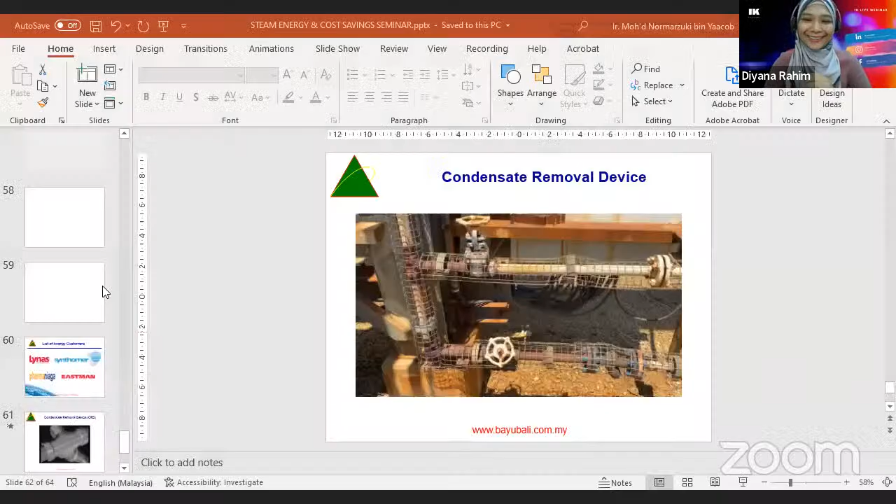Assalamualaikum and good morning to everyone. Our topic today is steam plant energy and cost savings. Basically, the boiler is part of this training, and ICE I will cover later on with the next slide.

This is about myself. Miss Diyana already mentioned my profile, but I put it here again as a brief summary. I'm a mechanical engineer, graduated from University of Malaya in 1996, considered an OTA engineer. I'm also a professional engineer with practicing certificates in mechanical, and a first grade steam engineer and ICE engineer by DOSH.

My field of expertise is mainly steam boilers, steam energy and cost saving, and any mechanical works inspections, but I've put a summary here. Just a little bit about my career profile.

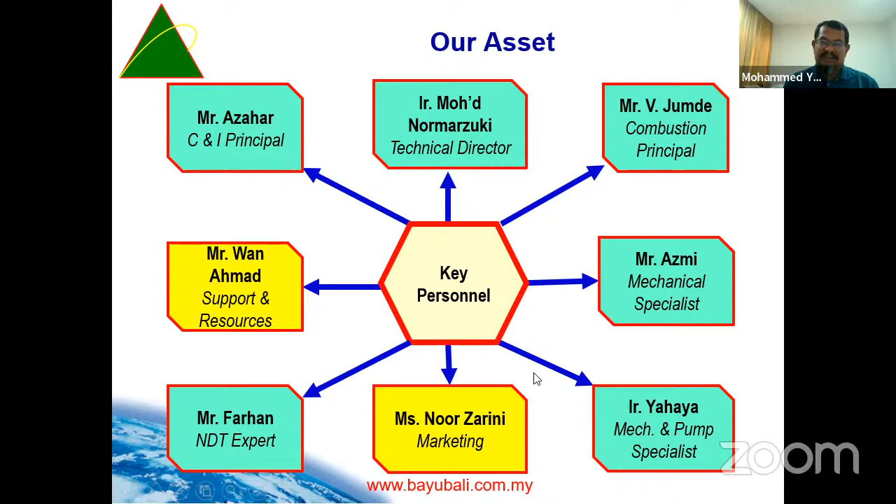So some of them are our consultants, and then Ms. Noor Zarini is our marketing.

So our business, as I mentioned, we started with technical training courses, but now that's not our main business. And maintenance services, yes, we did boiler overhaul maintenance, boiler inspections. This is actually our core business right now.

Our core business, we shifted from training to steam energy improvement plans, or projects. We don't just audit and pass the report to the clients and then the client cannot go anywhere. Basically, we are a one-stop center for this.

And then we provide also visiting engineer for boiler and ICE. And one thing is about the combustion optimizations.

Right now we are in the process of getting the purchase order for one plant in Kluang, because they have some problem with the combustion. So we already did the preliminary work.

And then we are doing the steam plant design review. And then we also provide the steam piping design. Currently we are in the process of designing for one of the companies.

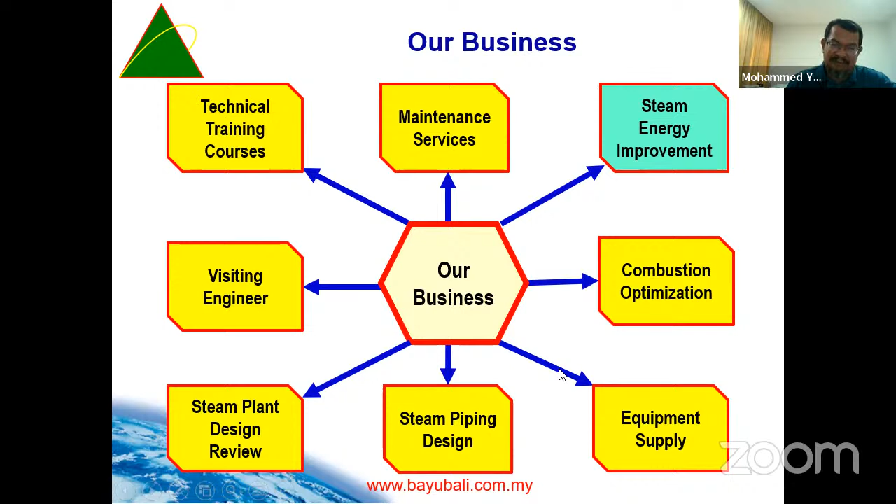And then we also provide equipment supply, for example we supply valves, pipes. Yesterday we got an order, one big valve, so my staff just sent it over.

So, let me see the steam energy.

Overview of steam energy efficiency. Energy efficiency simply means using less energy to perform the same task. It is eliminating energy waste.

Energy efficiency brings a variety of benefits like reducing greenhouse gas emissions. If we are efficient, we'll burn less fuel, so we reduce the GHG. It also reduces demand on energy imports, since we burn less fuel if our plant becomes more efficient, and it lowers costs at an economy wide level.

Steam systems account for around 30% of the total energy used in industrial applications for product output.

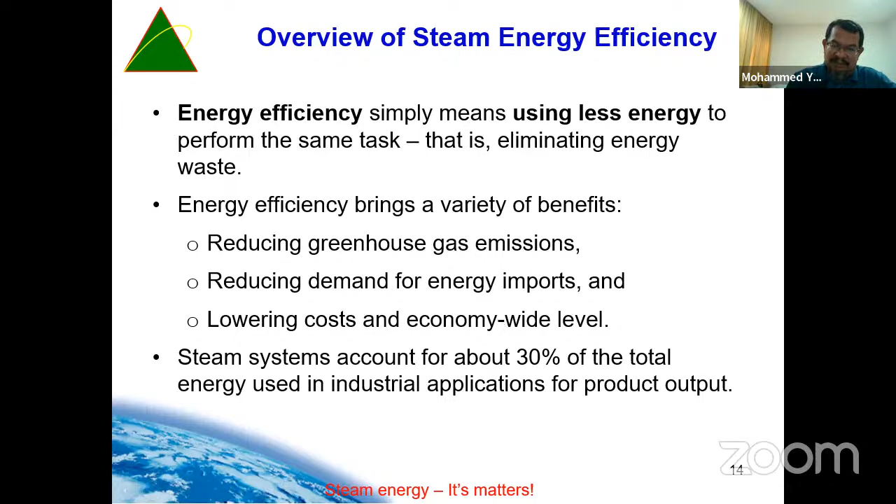Like 2 days ago, I visited one of the paper mill plants in Penang. They use a lot of steam for their dryer system, so they asked me to design the steam pipe for them. Now I'm in the process of preparing the proposal for them. And steam systems can be...

...indispensable in delivering the energy needed for process heating. We know steam is used a lot for process heating, not only for manufacturing, but in oil and gas, petrol, and chemicals, they use steam for process heating, for example to heat up the heat exchanger, and for pressure controls.

And then mechanical drive. Mechanical drive is mainly used in power generation, or to drive pumps and compressors. And then separation of components and production of hot water for process reaction.

Some plants use hot water for part of their process. For example, I'm in the process of negotiating right now with one company in Penang to install what we call condensate recovery pumps. They use hot water, so we want to integrate the hot condensate into heating up the hot water for their process.

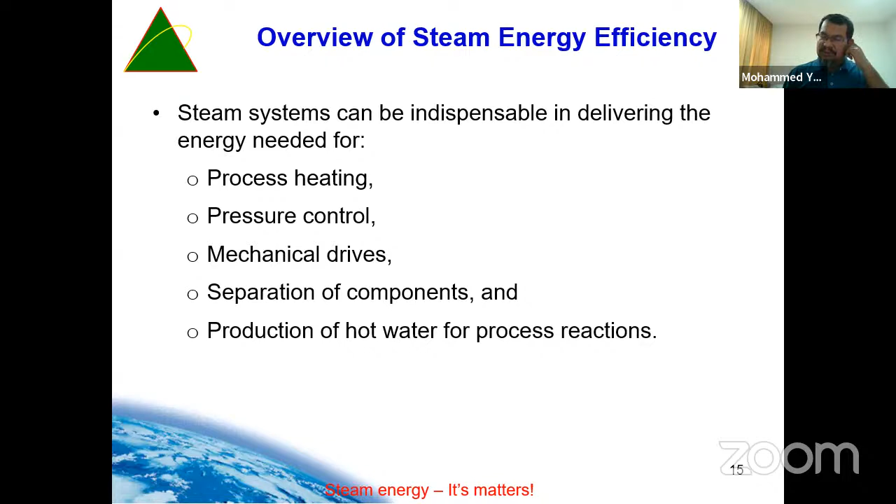An efficient steam plant will give the following benefits: energy efficiency improvement can reduce utility bills and improve the plant's bottom line. Many improvements require little or no extra investment, are easy to implement, and have a payback time of less than 1 year. For example, if we operate our system properly, we don't need to do some investment.

For example, for superheated steam, if we control the temperature properly, we will gain some extra energy.

Strategies that increase energy efficiency often reduce operating and maintenance costs, minimize waste, and enhance production. Energy efficiency helps reduce negative impact on the environment, of course reducing fuel burning, and can enhance corporate community relations programs.

Basics of the system. Why steam? Steam is odorless, colorless gas, what we call the gas phase, created when water is heated to its boiling point and changes state, or vaporizes from a liquid to a gas phase. There are three principal forms of energy in industrial processes: electricity, and then direct fire heat.

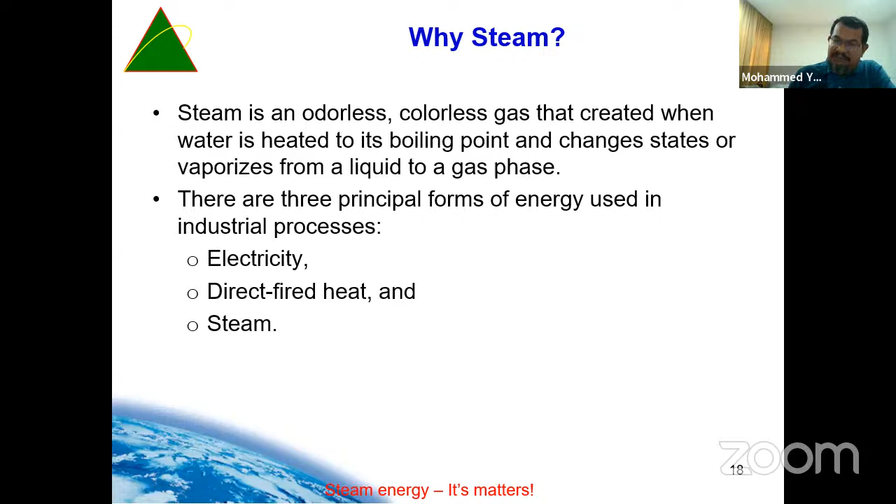Like electricity, we know we can use it for heating, for example they have electric heaters. And direct fire heaters, such as in refinery and petrochemicals, they use the furnace to heat up the products. And then the other one is steam, they can use steam also, depending on the application.

Direct fire energy directly transfers the heat of fuel combustion to the process. Steam has many performance advantages that make it an indispensable means of delivering energy. These advantages include low toxicity, ease of transportability, meaning that steam is easy for us to transport from point A to point B, which requires us to design the proper piping system.

And then high efficiency. For example, my boiler last time in Petronas, we were using the Macchi boiler from Italy, designed in 1994 or 1996 with 92% steam to fuel efficiency. But I came to know that they installed a new boiler in Petronas Methanol, and the new boiler is 2% higher, meaning that even 2% contributes to a huge saving.

High heat capacity and low cost with respect to other alternatives. Steam holds a significant amount of energy on a unit mass basis that can be extracted as mechanical work through the turbine or as heat for process use.

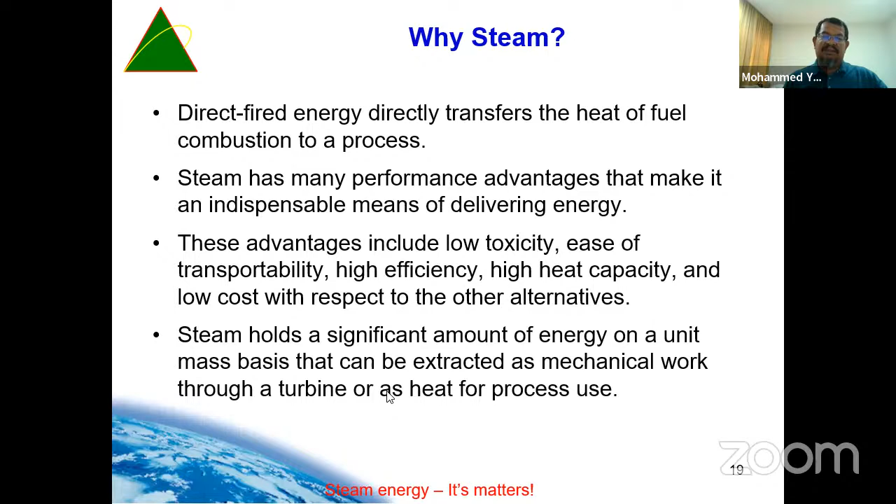Since most of the heat content of steam is stored as latent heat, large quantities of heat can be transferred efficiently at a constant temperature, which is a useful attribute in process heating applications. Of course, there is some pressure drop, but we can calculate that.

Example, this morning I calculate the pressure drop for point A to point B for one plant.

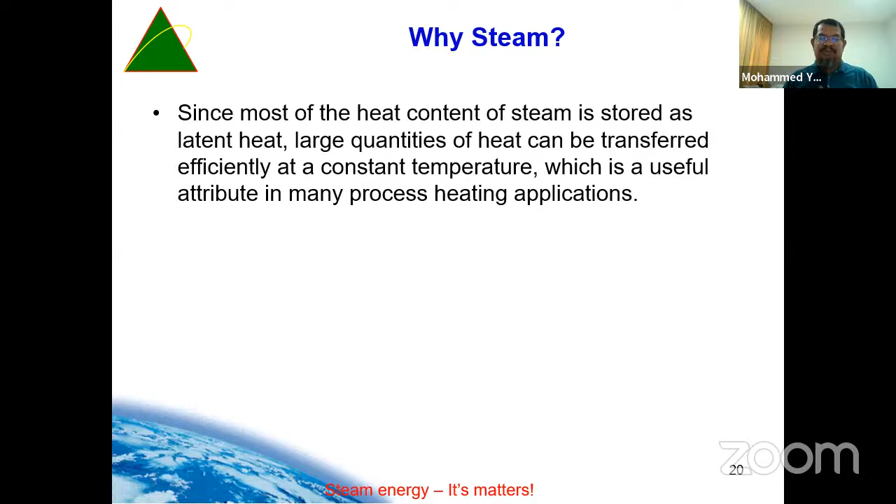And then steam system operation, there are 4 categories in steam system components. Like we have the boiler itself, we call generation. And then this one, everyone is looking for this one. Basically we have the boiler man, the boiler driver, the boiler engineers, everybody are looking for the boiler, we call generation. But not many people...

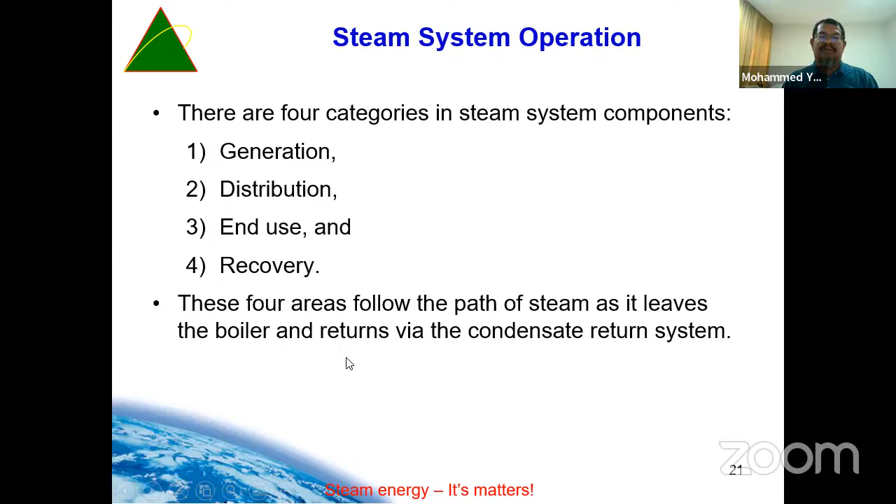...looking into example, the distribution of the steam. Is the distribution correct or right or wrong? And then end use, which is the end users, the steam users. And then what we call the recovery. The recovery is basically what I want to focus on for this lecture. These 4 areas follow the path of steam as it leaves the boiler and returns via the condensate return system.

Example, this one is we call generation. So generation meaning that we pump the water from boiler feed water system to the economizer. Maybe some boilers have an economizer, some boilers don't have. That one is okay, we don't need to discuss too much here.

And then they burn fuel inside the furnace, so they produce steam, and the steam goes to what we call the distribution pipes, or distribution header. After that, they distribute to the end users, just like heat exchanger, process heater, and then steam turbine maybe, and then some of the steam maybe use what we call the extraction valve. And then the condensate will go to the pipes and collect, maybe using what we call a condensate receiver tank. They pump to the deaerator, and then the water will pump back to the boiler as makeup water.

So generation: steam is generated in a boiler or a heat recovery steam generator by transferring the heat of combustion gases to water. When water absorbs enough heat, it changes phase from liquid to steam.

In some boilers, a superheater further increases the energy content of the steam. Some boilers have a superheater, meaning we want to increase their energy. We heat up the temperature, so energy also increases.

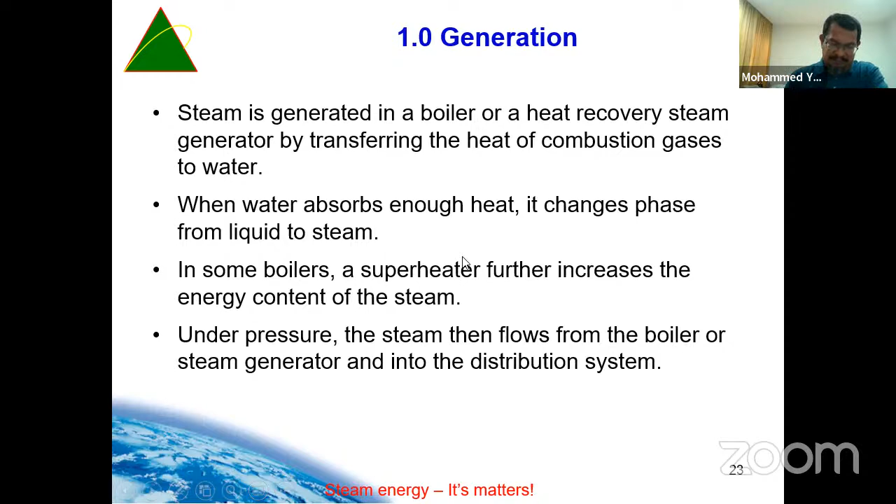Under pressure, the steam then flows from the boiler or steam generator and into the distribution system, which is the pipes. The distribution system carries steam from a boiler or generator to the points of end use. Many distribution systems have several takeoff lines that operate at different pressures. These distribution lines are separated by various types of isolation valve, pressure regulating valve, and back pressure turbine.

Like my plant last time, we have a 28 megawatt back pressure turbine. And then last year I visited one plant, they asked me to review their what we call their energy balance. So they have the back pressure turbine also. The back pressure turbine basically they want to use the low pressure steam for the process, which is for heating process.

A properly performing distribution system delivers enough high quality steam at the right pressures and temperatures to the end use, meaning that the distribution also needs to be designed properly.

Because like one plant that I visited a few days ago, they designed the steam plant without proper design, and then one day the headers got dislocated because of the expansion, and then for the new plant they want to engage with me to design the steam pipe for them. It's okay, so that's my job.

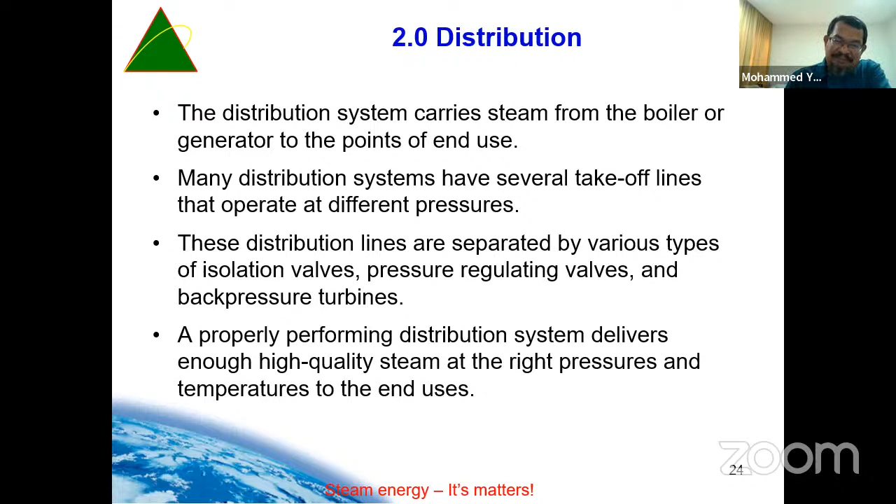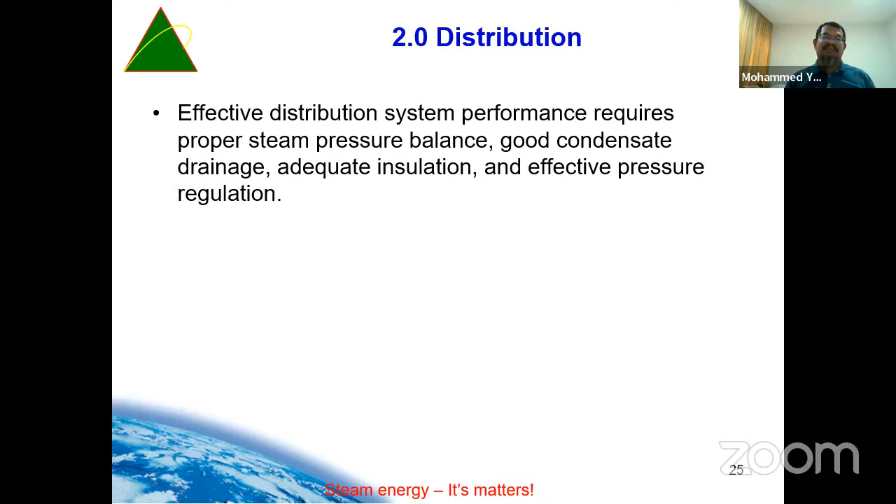And then effective distribution system performance requires proper steam pressure balance, good condensate drainage, adequate insulation, and effective pressure regulation. So in the design of the headers, or like when we audit the plant, we also check for insulation, drainage, steam trap, all these things.

And there are many different end uses of steam, such as process heating, mechanical drive, chemical reactions. Some plants use steam as part of the process, like my client in Gebeng, they use steam as part of the process. And then fractionation of hydrocarbon components, this one they heat up the hydrocarbons. In the heat exchanger, the steam transfers its latent heat to a process fluid.

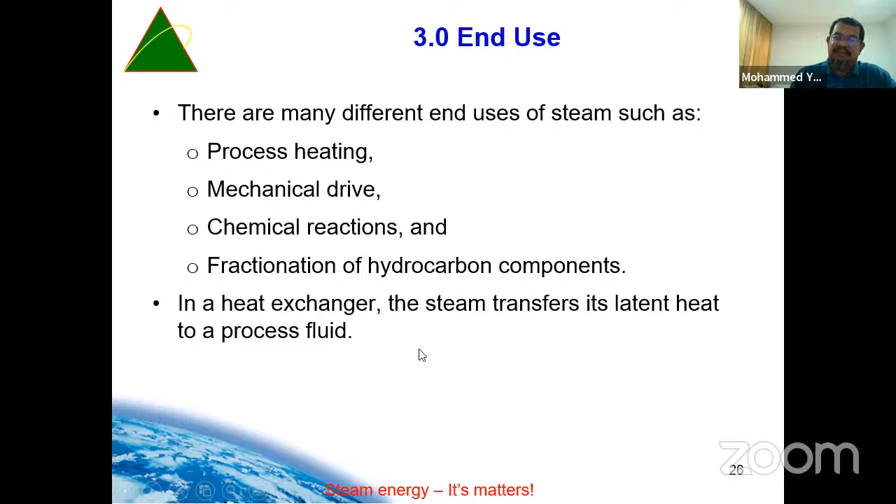And then the steam is held in the heat exchanger by a steam trap until it is condensed, at which point the trap passes the condensate into the condensate return system.

I will explain later on about a project that I completed. In one plant, they suffered from the condensate problem since day one. Maybe 5 years before I solved their problem.

So in a turbine, the steam transforms its energy to mechanical work to drive rotating machinery such as pumps, compressors, and electric generators.

Recovery: the condensate return system sends the condensate back to the boiler. The condensate is returned to a collection tank or vessel. Basically, this is like a waste.

Some people are not interested in condensate recovery, but like me, I'm really interested, because we know that if we recover the condensate at a good temperature, we can save a lot in terms of boiler operating expenditure.

And then sometimes the makeup water and chemicals are added here, while other times this is done in the deaerator. Sometimes they add chemical here and there, so this is sometimes called condensate treatment.

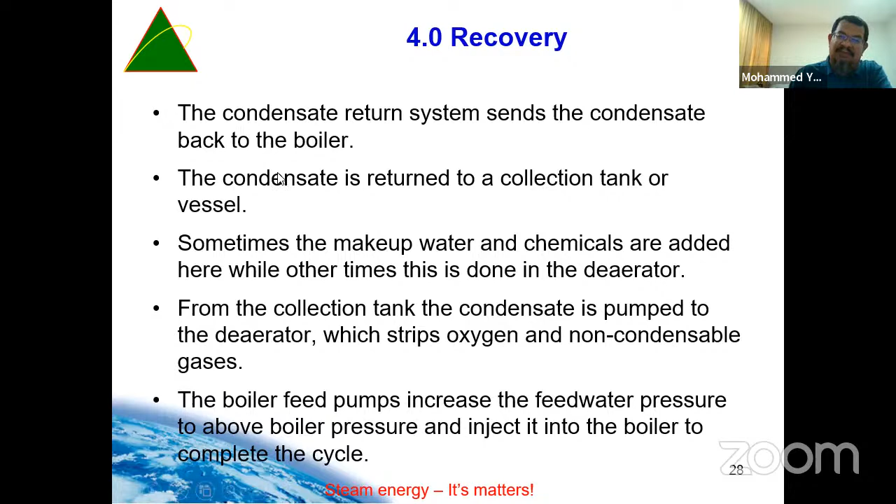So steam cost: to determine the true cost of steam, we need to know more details about the system, the steam in question.

Are we discussing steam at the point of use or at the point of generation? Because if we talk about use, we need to consider also the piping cost, everything about the steam trap installation, the piping, and then the pressure drop also.

And then, from which boiler? Which boiler do we use? We use a water tube boiler, gas fired, or biomass, for example.

And then at what header pressure or at what quality? Average cost or marginal cost? If average cost, do they include both fixed and variable cost? That is just the question.

Furthermore, we must distinguish between the cost of generation and the cost of consumption. We have two different things: the cost to generate and the cost at the consumption.

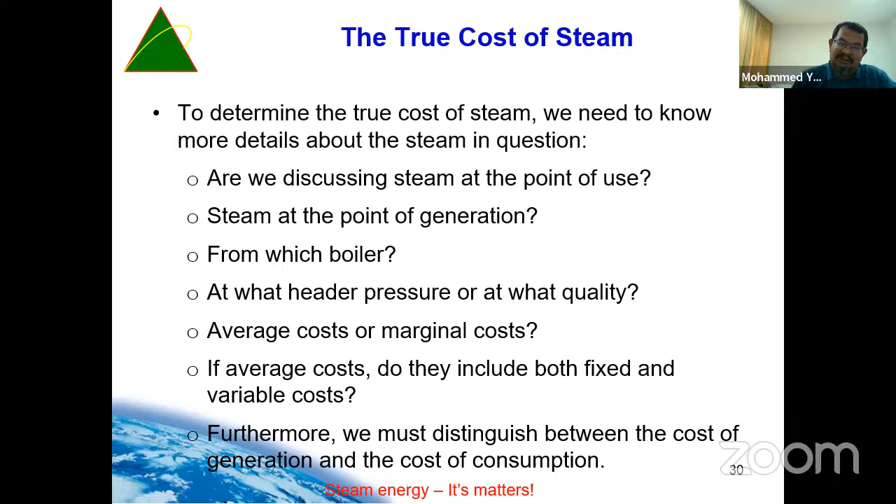If the plant has only one steam boiler, a steam generator, uses a single fuel and has a single steam pressure level, it is relatively easy to assign a cost to the steam.

However, in most cases, there are multiple steam sources and multiple fuels. There are also multiple steam pressure levels with multiple paths by which the steam pressure is reduced. For example, steam pressure can be reduced by a pressure reducing valve or turbines. Determining the true cost of steam then becomes far more complex.

Meaning that if we have a back pressure turbine and pressure reducing valve, and we generate more than one steam level in our boiler, the cost becomes a little bit complex.

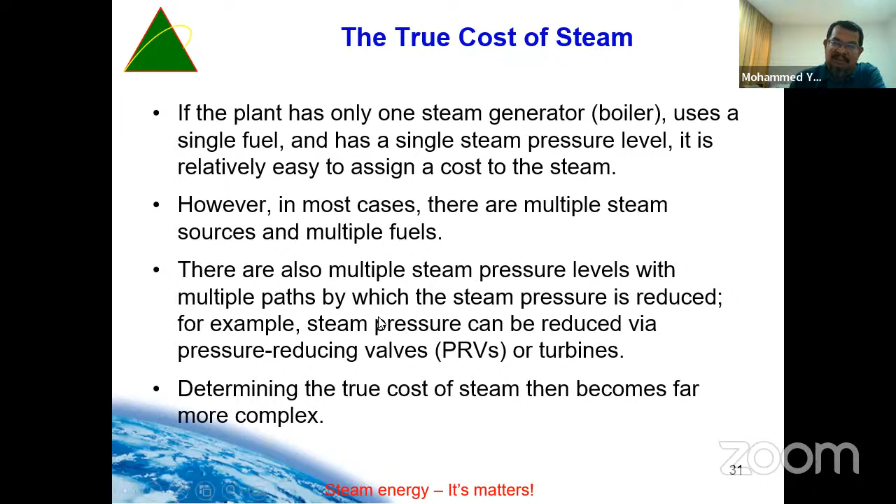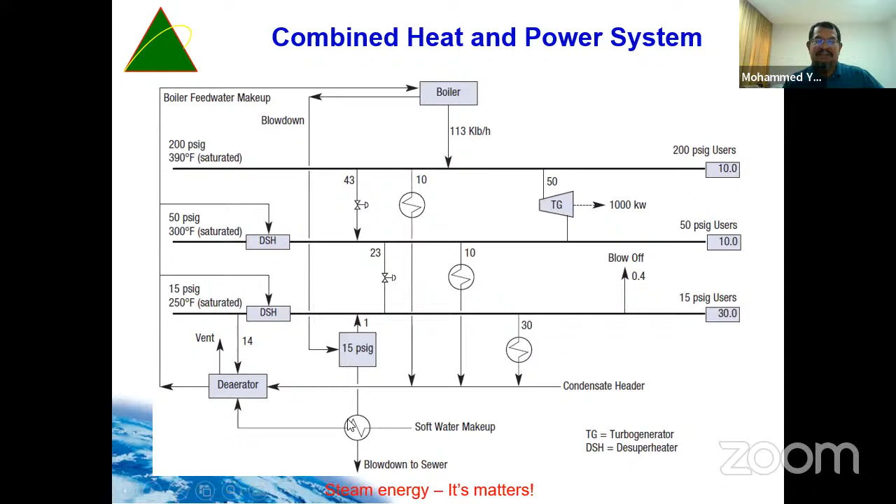After that, maybe they use a turbine - this one is an extraction turbine. So they use the back pressure for 50 psi, and then they use a pressure reducing valve. This one is from the heat exchanger, going to the condensate, for example. So to calculate the cost for this is a little bit complex.

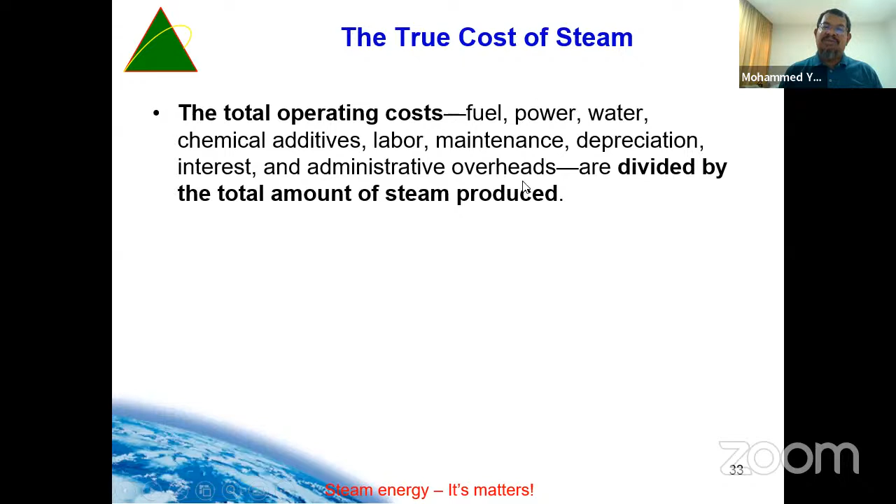The total operating cost - fuel, power, water, chemical additive, labor, maintenance, depreciation, interest, and administrative overheads - are divided by the total amount of steam produced. This is the most difficult part, like labor costs, maintenance costs, and depreciation.

Yeah, but in general, for the fuel cost, we can estimate like this. The fuel cost is usually the dominant component, accounting for as much as 90% of the total cost. Normally we use this formula: cost of fuel in dollars per 1,000 pounds of steam is equal to fuel cost in dollars per MMBTU times enthalpy of steam minus enthalpy of the feed water.

And then divide by 1,000. Cost is measured in units of 1,000 pounds per hour, and then overall boiler efficiency, fractional, we put 90 maybe, we can calculate. So we can calculate this one, the cost of fuel.

And then calculating for the cost of steam generation, in practice it is usually sufficient to use an approximation: cost of generation is equal to cost of fuel times 1 plus 0.3, which is the number sometimes people use 0.35, representing the typical value of the sum of the cost components. There is actually another slide, not in this one, I removed it, from item 2 to 9 above, meaning there are some cost components.

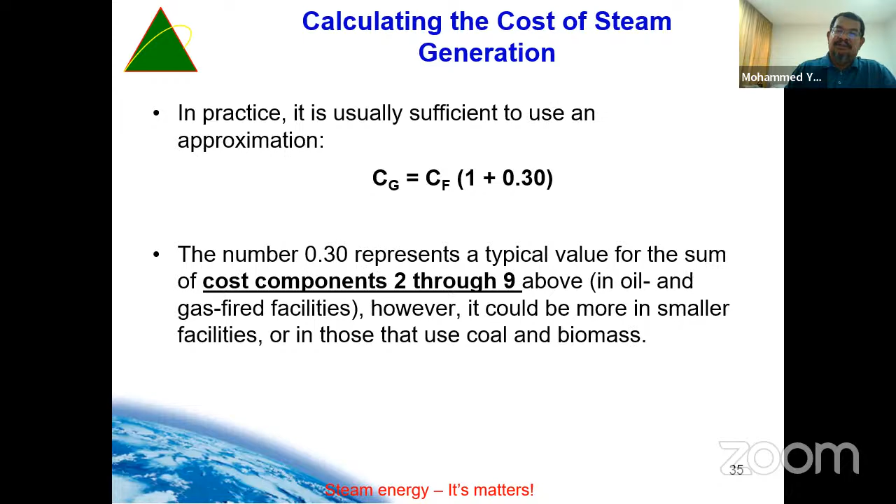So, factors affecting steam plant efficiency.

Factors affecting steam plant efficiency: loss due to the heat carried up the stack by the flue gases, high excess air as measured in the flue gas analysis. Some plants tend to ignore this. Like during my time in Petronas or in the Shell example, they have very strict control on what we call excess air.

Last February, one plant in Kluang engaged with me to troubleshoot their so-called waste gas boiler, which used a lot of fuel to run but produced very little steam.

So I went there and did the O2 measurement. Basically the flue gas oxygen level was very high, instead of normally in the design for that waste gas boiler, where they normally run around 11.7. But during the measurement, we noticed that the flue gas oxygen was around 14%.

The dirty or scaled water side and fire side affects heat transfer surfaces. This stack temperature can increase because of dirty or scaled water side and heat transfer surfaces or fire side.

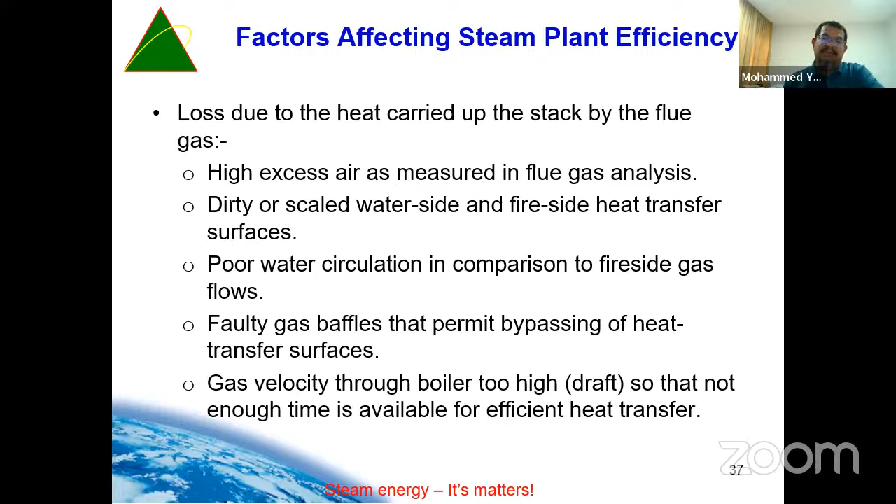And then gas velocity through the boiler too high, the draft, so that not enough time is available for efficient heat transfer. If the draft is too high, it will also reduce the heat transfer efficiency.

And then loss due to moisture in the fuel. Normally we need to be careful when we select the fuel, the calculation must be correct. We need to make sure when we buy the fuel whether we want to use lower heating value or higher heating value.

Loss due to the combustion of hydrogen in the fuel that forms moisture and goes up the stack as vapor. That's why, friends, if you notice the natural gas that Petronas uses in our plants, some plants normally use methane, not butane or propane, because of the hydrogen content in the components.

Because the higher the hydrogen content in the composition, the higher the H2O, yeah, moisture. Loss due to moisture in the air used for combustion, yeah.

Loss due to incomplete combustion, like insufficient air supply, cool furnace at low load, yeah. We try to avoid what we call the low load. Normally every boiler has a minimum load, a cut-off load, yeah. Poor atomization or pulverization of fuel, atomization of liquid fuel and pulverization for coal fuel, yeah.

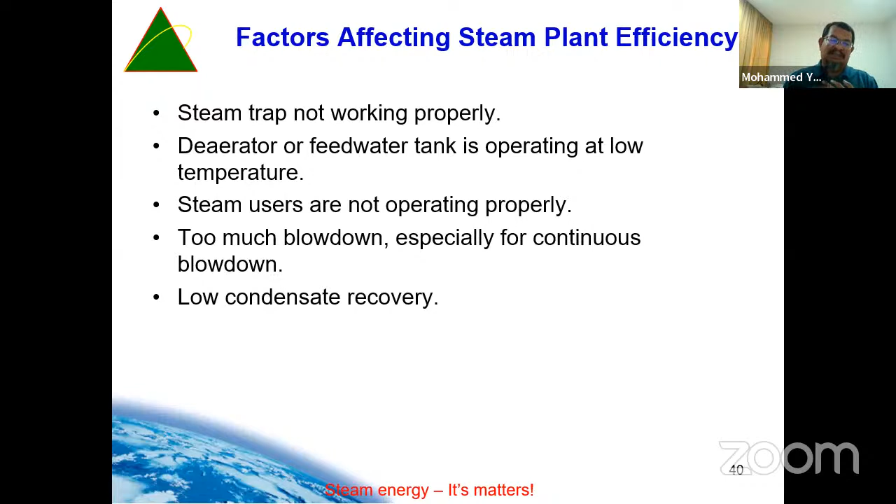And then, tips to increase boiler plant efficiency. I'm not talking about the boiler itself, I'm talking about the whole plant.

But last 2 years, I think before PKP, I visited one plant in Johor. They asked me to do the energy study for their plant, to see how much they can save, how much saving they can do for their boiler plants, for the steam plant. So me and my team visited this plant. I don't want to mention the name, I'm sorry, because I cannot disclose it now. So me and my team went there and discussed with their engineers. Basically this is just what we call an overview.

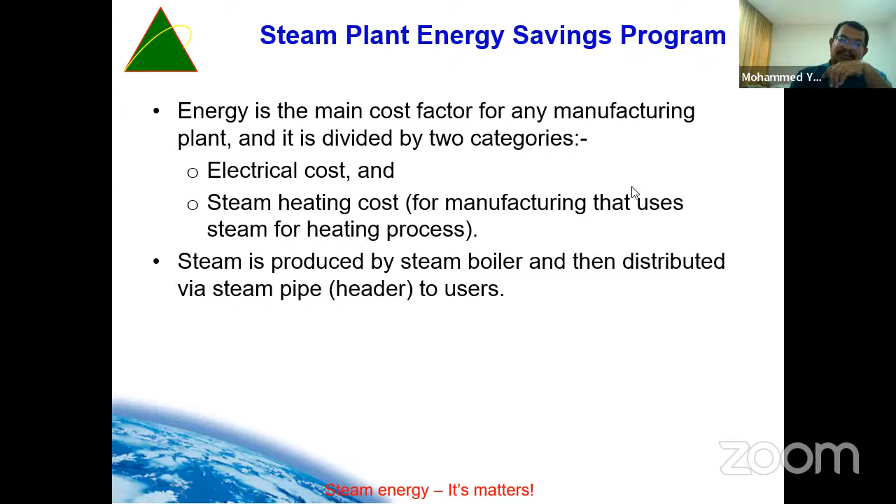Later I'll go straight to this one, okay.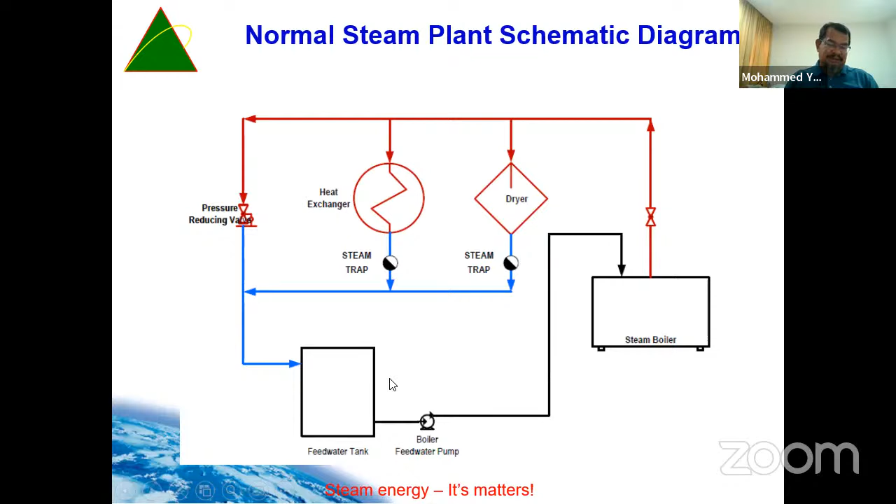For this polymer plant example, they have a firetube boiler with boiler efficiency around 73%. Basically the boiler running capacity - I think boiler number 3 or number 1, something like that. Two weeks ago I went there because we have a project with them - 10 ton per hour operating at 10 bar. They provided us with the data so we could calculate and estimate. They use around 1.5 million US dollars per year for the fuel, natural gas, so around 6 million. Estimated steam cost is around $21 per ton, and the feed water temperature is 105.

For steam, condensate and water makeup - steam usage is around 7.5 tons per hour. Condensate return is around 3.5 tons per hour. They use steam to heat the deaerator around 740 kg per hour. Treated water makeup consumption is around 6.8 kg - that's basically feed water. The treated water cost is around RM3 per ton.

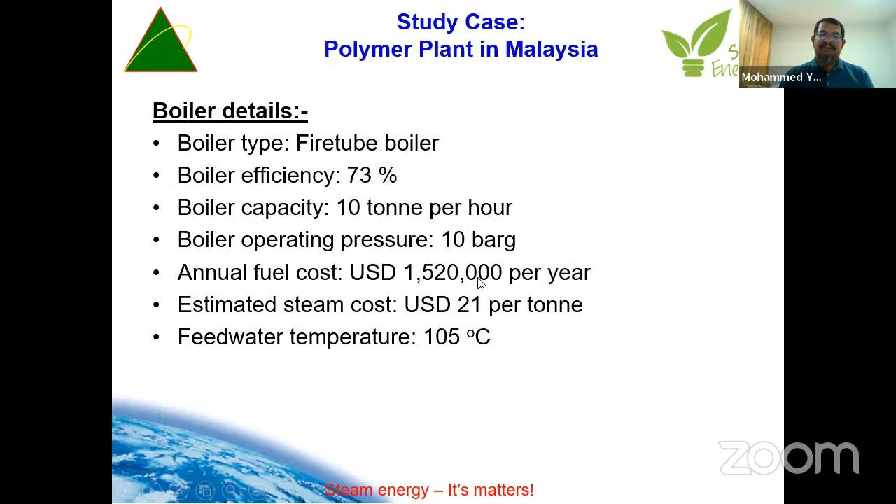So after we did the study, we formulated their plan with lots of calculations. We are able to increase their feed water temperature around 22 degrees, from 105 to 127. We're able to reduce their motive steam to 380 kg per hour, and treated makeup water to around 4,000 kg per hour, 4 tons. The annual fuel cost from 1.5 - from our calculations, they can reduce to 1.46, meaning they save around 60,000, something like that. But never mind, we can see here.

So fuel saving is around $60,000 per year - it's a big amount. The water saving is around $19,000 per year, and the motive steam saving is around $40,500 US dollars per year. So total saving is around $120,000 per year for this plant.

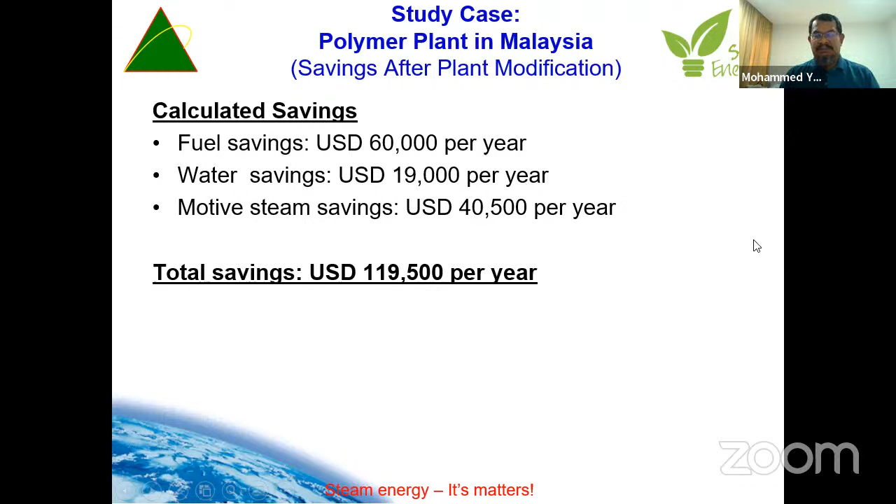And example project cost - we estimated the project is around 235,000. So the payback is normally around 2 years, or a little bit less than 2 years, something like that. So it is good for industry to look into this kind of project.

Of course, like my company, we are also doing combustion checking and inspections - that's what we call the hanging fruits, potential savings. For example, from 14% to 11.7%, the reduction is around 2.3%. It's a big amount also - about 1% of fuel energy saving. In general for a boiler, normally we need to run O2 at around 1.2 up to 2%. If the O2 is high, it means you lost efficiency.

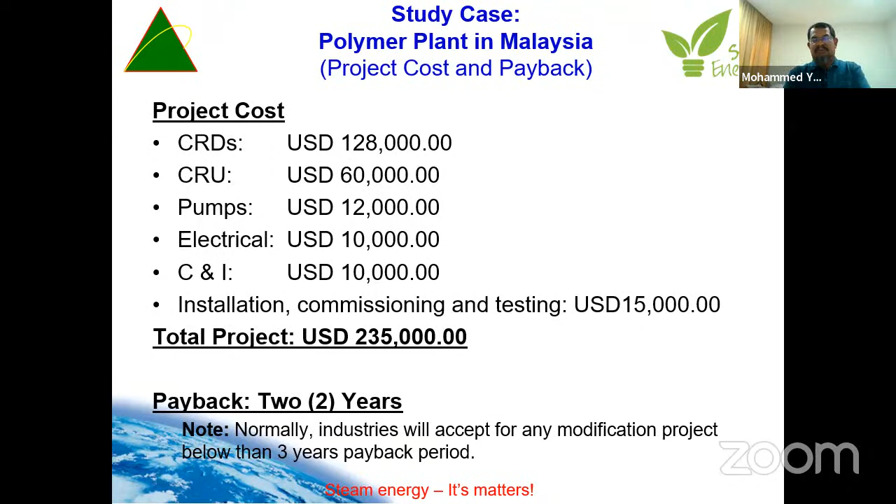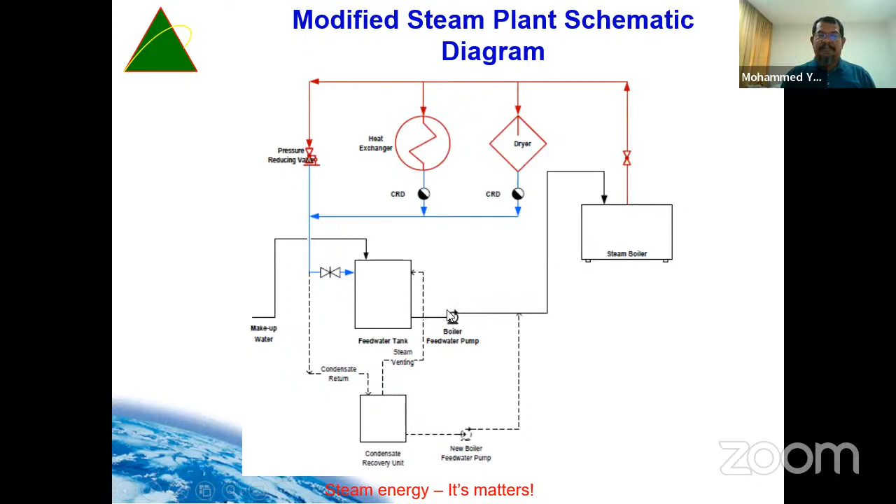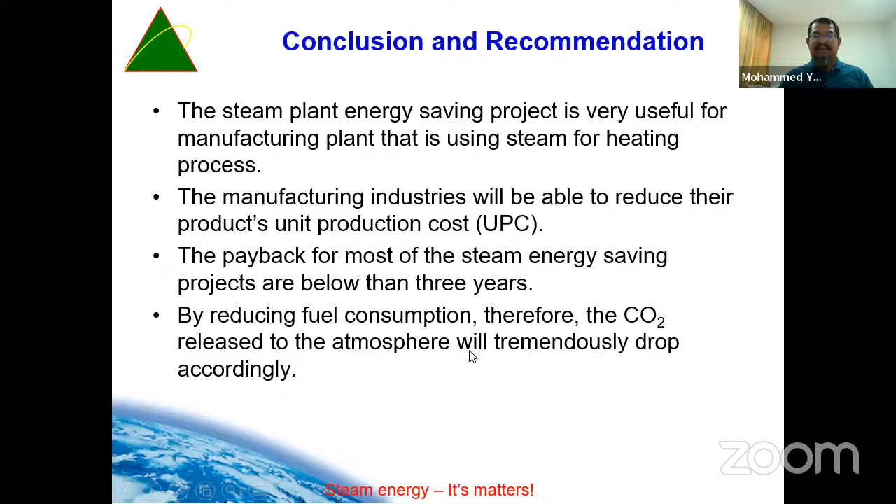So the conclusion, steam plant energy saving is very useful for manufacturing plants that use steam for heating process. The manufacturing industry will be able to reduce their unit production cost, UPC. The paybacks for most steam energy saving projects are below 3 years, so it's good to look into. By reducing fuel consumption, the CO2 released into the atmosphere will reduce tremendously and drop accordingly. This is an example.

My company, we are doing maintenance services. Since 2020, for example, we overhauled one boiler in Port Klang, at the Golden Horse Rubber.

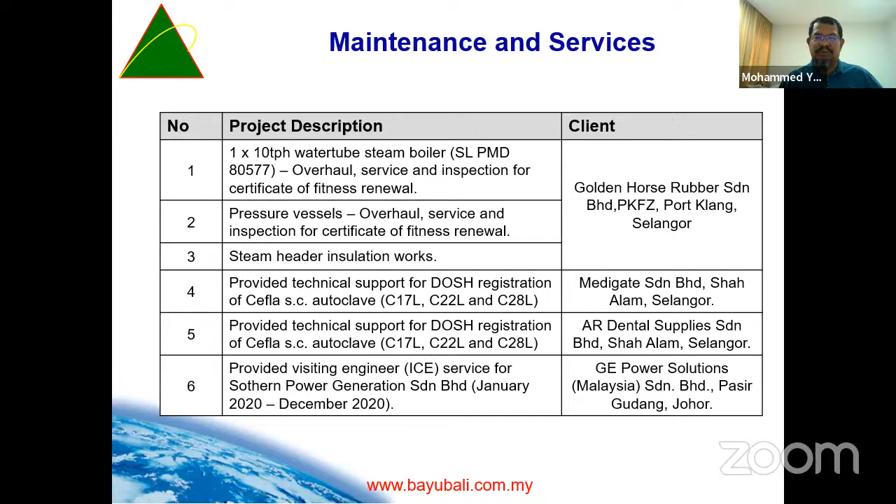We did the non-destructive test, hydrostatic test, and this boiler, they awarded us the project to repair their boiler. So our team is now preparing what we call the repair procedure to submit to DOSH for approval.

And then Pharmaniaga in Puchong, last year we got the project to upgrade their steam plant. We installed condensate pumps, steam traps, thermodynamic flow meters, and a monitoring system, and relief valve. We needed to change it because the valve the manufacturer proposed couldn't fit at that place. And then we used a monitoring system.

And then we did the steam plant energy saving study for Eastman in Gebeng. From our analysis, this plant is able to save around 2.7 million a year. I just submitted the report this week.

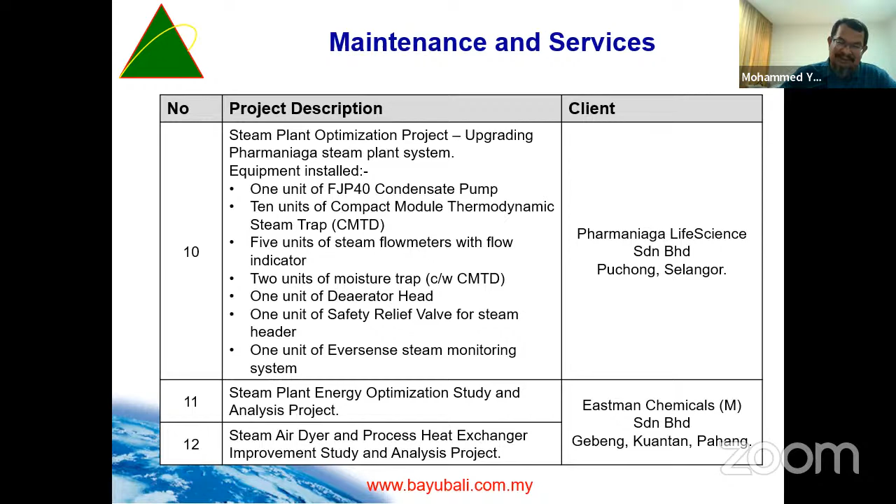And then number 12, we did the study and engineering also. We installed our equipment for their steam dryers and heat exchanger. The steam dryer had some problems since day one, and alhamdulillah, we were able to solve that. But this project for Eastman was really, what we call, very, very challenging because every report goes to their center in US, and the challenge, well, it's okay, it's not a big deal for me.

And then Lynas also, we installed our CRD system. This week, inshallah, they will order more. And then Edgenta, last time in the laundry plant, we audited their plant but couldn't materialize the project. There were some so-called problems, it's okay, it's okay, it's not a big deal for me.

And then steam plant energy optimization study for Synthomer Kluang, for example. We did the preliminary study on high fuel consumption for this plant. And then Idemitsu also, we haven't completed our study yet because they said they have some constraint. It's okay, but we just do the preliminary.

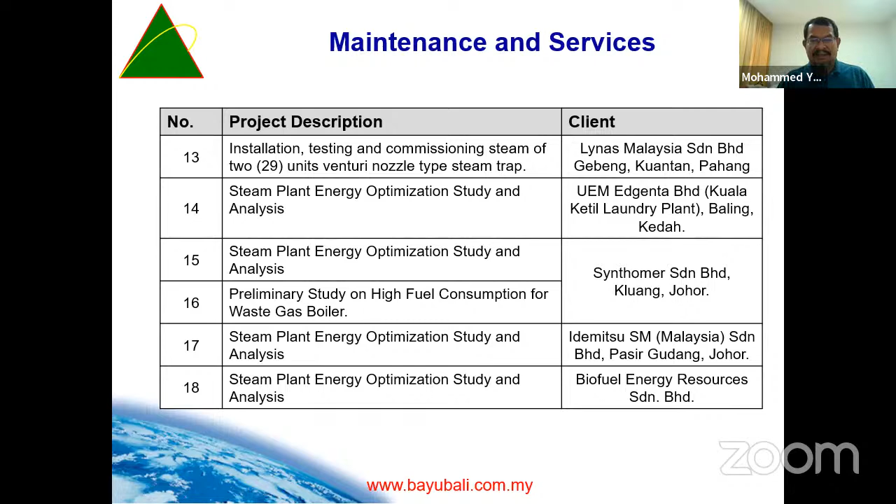And then for the biomass power plant also in this company, we did a study, and from the preliminary, we mentioned to them that if you want to improve your plant, you need to do this, do that. And then they said, I'm sorry, I cannot convince my client to send back the condensate.

We also provide consultancy on designing the steam pipe for steam boiler for kilang sawit FGV in Kuala Lipis. And then we are checking steam traps also for kilang sawit Jengka. We provide consultancy services for steam pipe design for Tawau refinery. This one is a very challenging job.

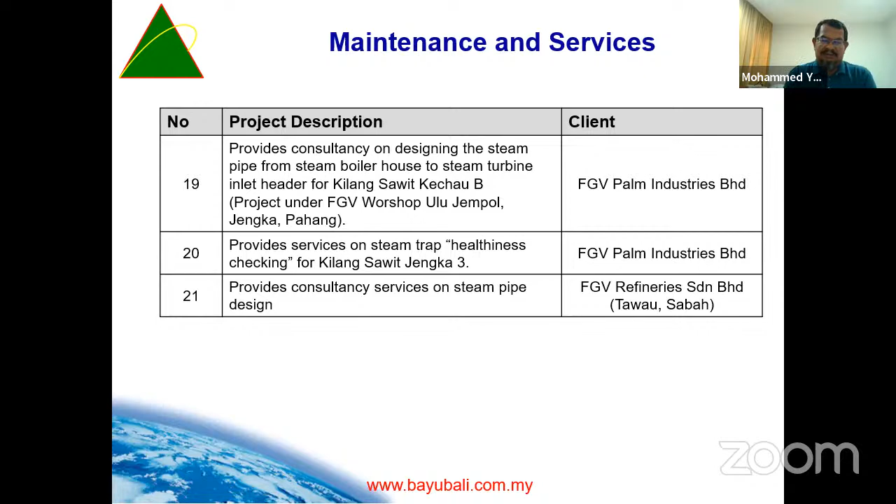So this is the companies that we have audited. We work with them closely. We have basically completed, some is ongoing.

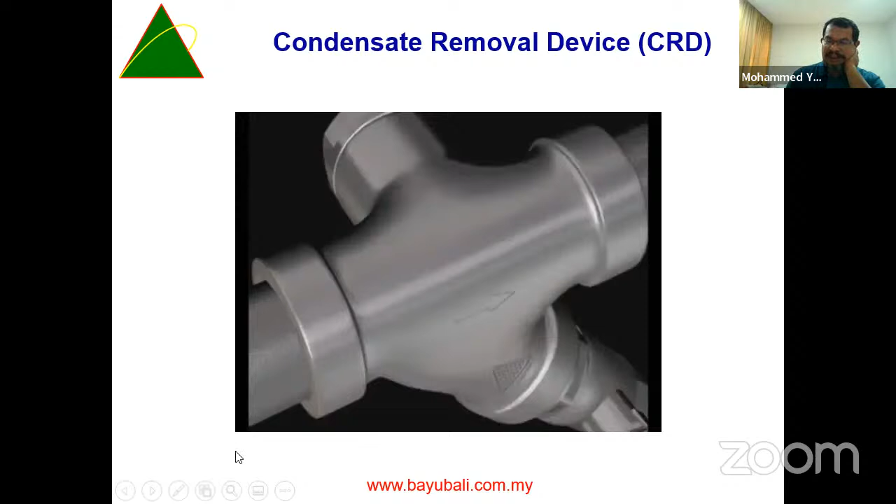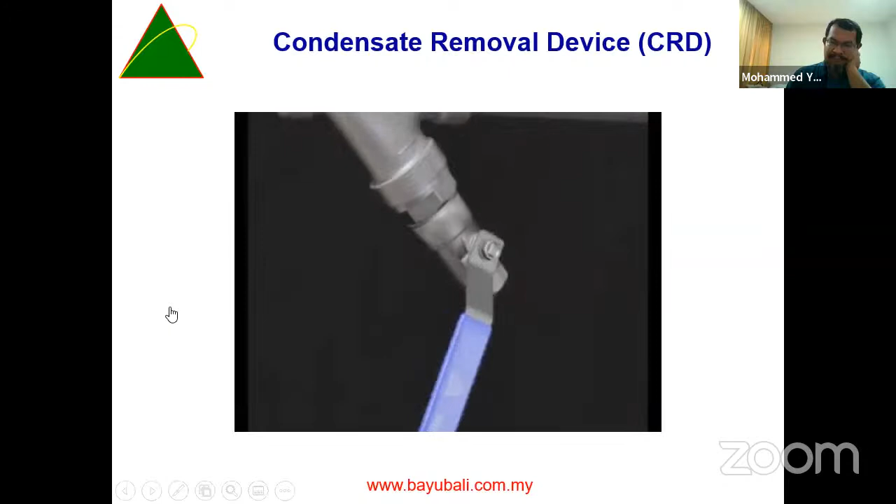Just to share with tuan, this is our CRD condensate removal unit, which is a type of steam trap, but it's venturi nozzle type. Steam and condensate enter the SteamPro condensate removal device, where condensate is first filtered out by the strainer. The filtered condensate continues to be pushed out by the steam, which enters SteamPro's customized venturi nozzle, where condensate is removed immediately, completely, and continuously, with minimal steam loss. Any accumulated debris can be flushed out through the blow-off valve.

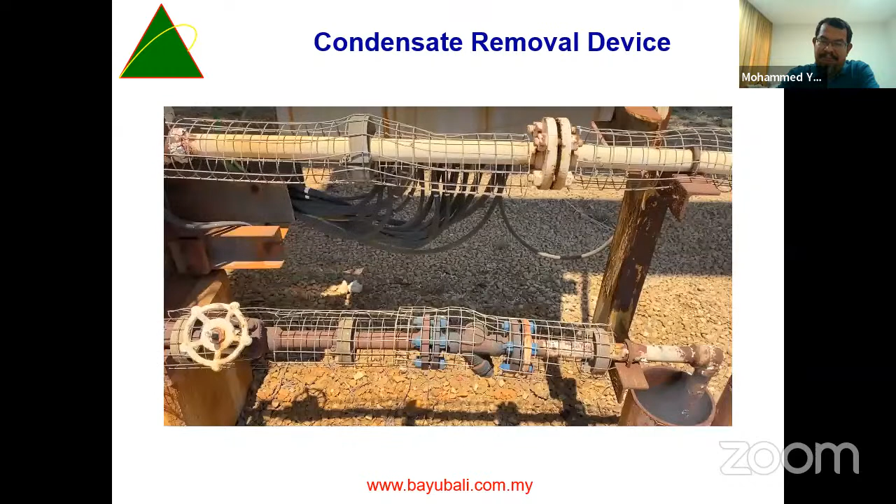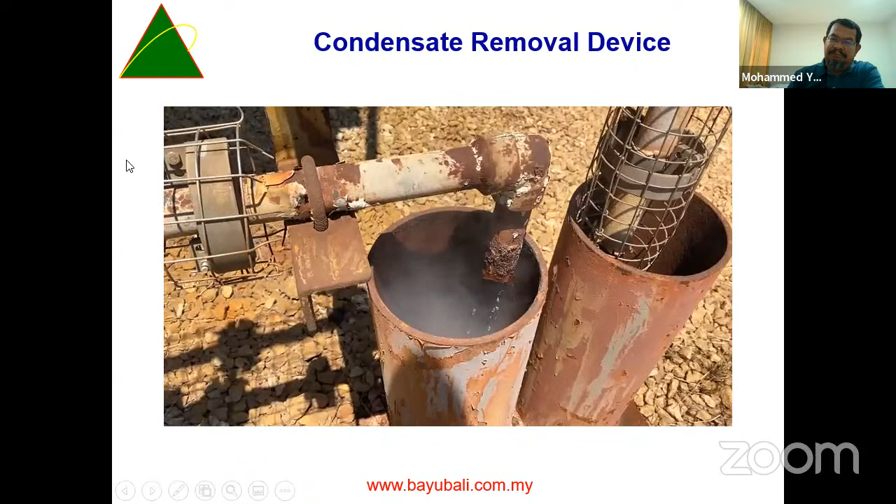Okay, so our CRD system basically produces condensates like this. It's not like the number one condensate, what we call the mechanical type steam trap, which normally is on and off like this. So maintenance is more or less - when you install it, you will forget the maintenance for 20 years.

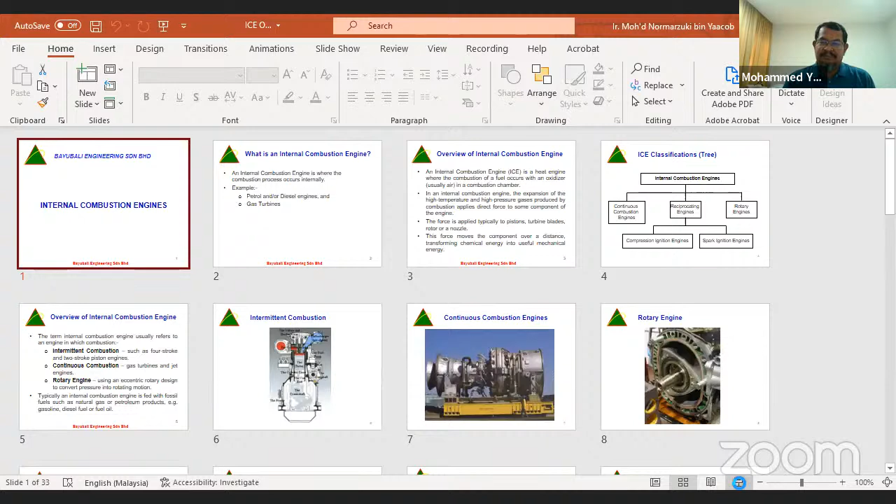So we go to our second topic before we end up. Okay, this is what we call the internal combustion engine. Just a little bit - okay sorry, I'm using your time, it's been an hour now. I promised the organizer 45 minutes. Sorry, just give me a few minutes. Okay, can, no problem. Thanks, yes, can.

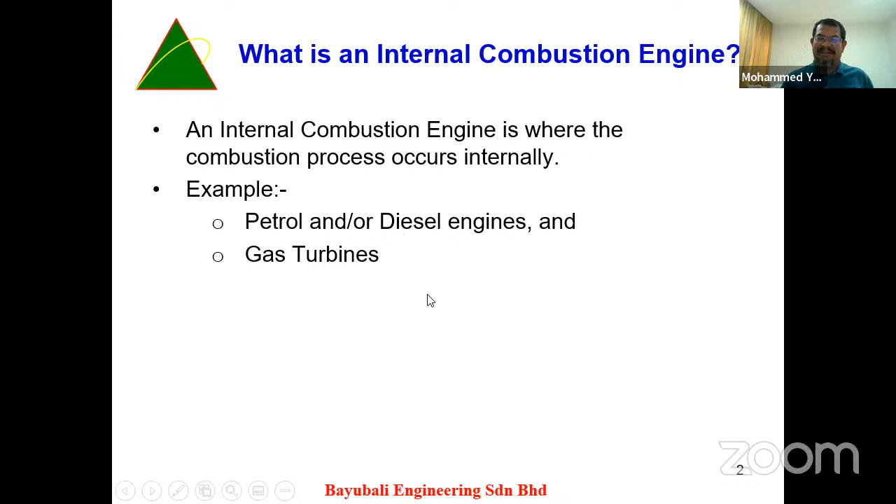Internal combustion engines. What is an internal combustion engine? An internal combustion engine is where the combustion process occurs internally, like diesel, petrol engine, or gas turbine. It is a heat engine where the combustion of fuel occurs with an oxidizer, usually air, in the combustion chamber. The expansion of the high temperature and high pressure gases produced by combustion applies direct force to some components of the engine, typically the pistons, turbine blades, or nozzle, or rotor and nozzle. This force moves the component over a distance, transforming chemical energy into useful mechanical energy.

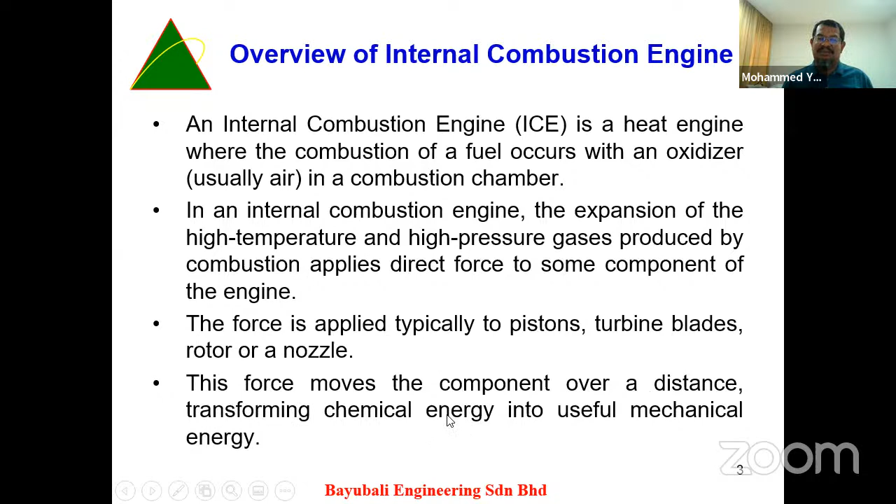So they have their family for ICE. They have continuous combustion engine, which is a gas turbine. Reciprocating engine can be like diesel engines or petrol engines. And then another one is a rotary engine. Rotary engines are used a lot in aeroplanes, basically, small type aeroplanes, not the big size. Big size aeroplanes use a continuous combustion engine. And then reciprocating engine can be compression ignition and spark ignition engine.

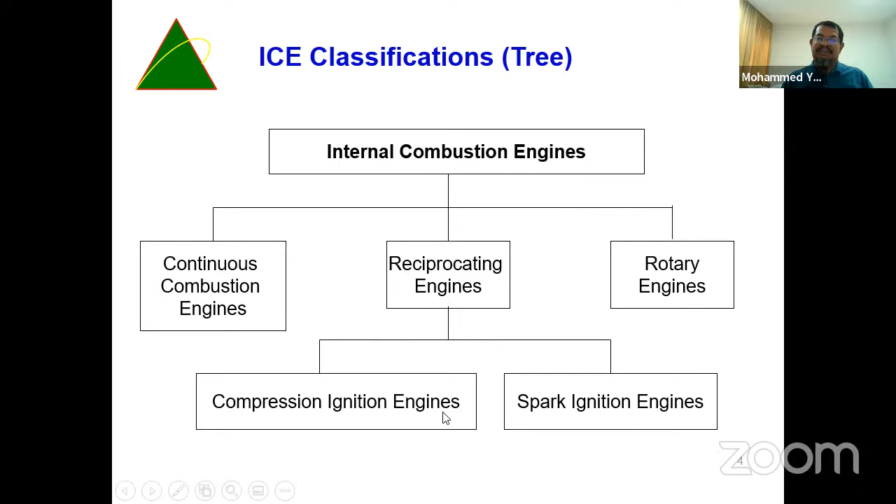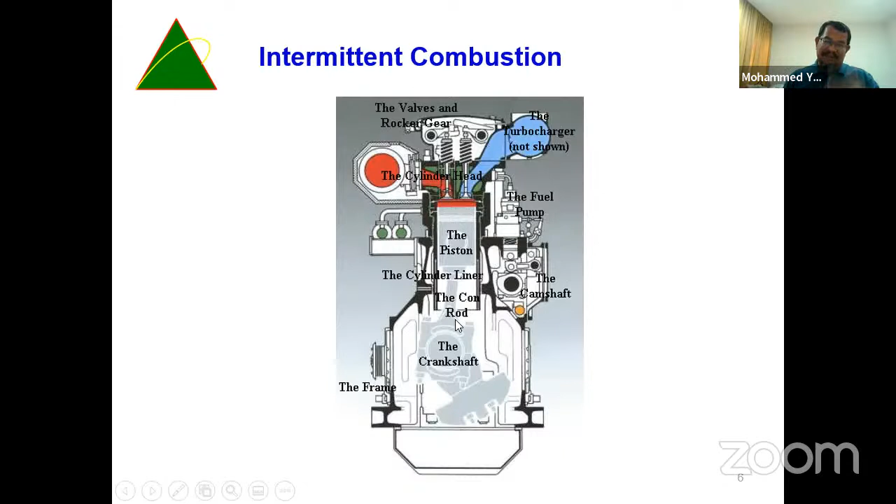An internal combustion engine usually refers to the engine in which there is intermittent combustion, such as a 4 or 2-stroke engine, like our car, diesel or petrol, doesn't matter. Continuous combustion is like a gas turbine jet engine; rotary engine uses an eccentric rotary design to convert pressure into rotation motion. Typically, an internal combustion engine is fed with fossil fuels, such as natural gas or petroleum products, example gasoline, diesel fuel, and oil. This one is an example of an intermittent engine - why intermittent? Because the piston going up and down is an intermittent process, but of course very fast, you cannot see it. This one is a continuous combustion engine with a gas turbine, and this one is a rotary engine.

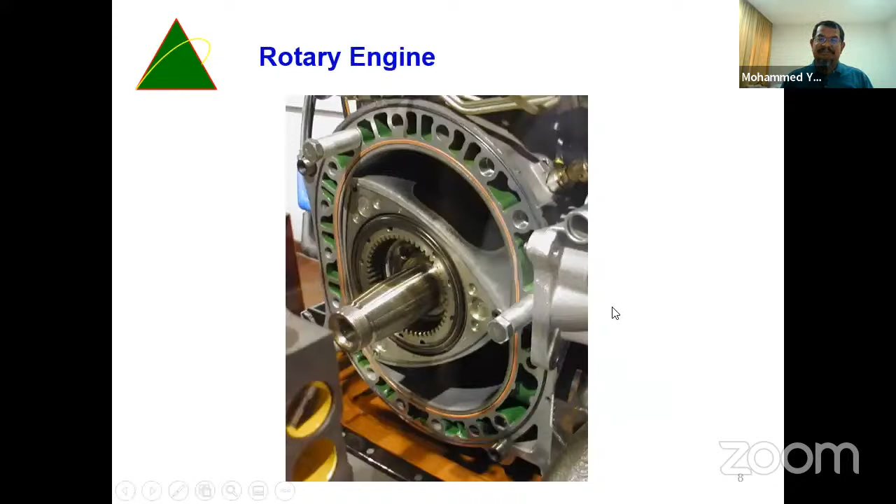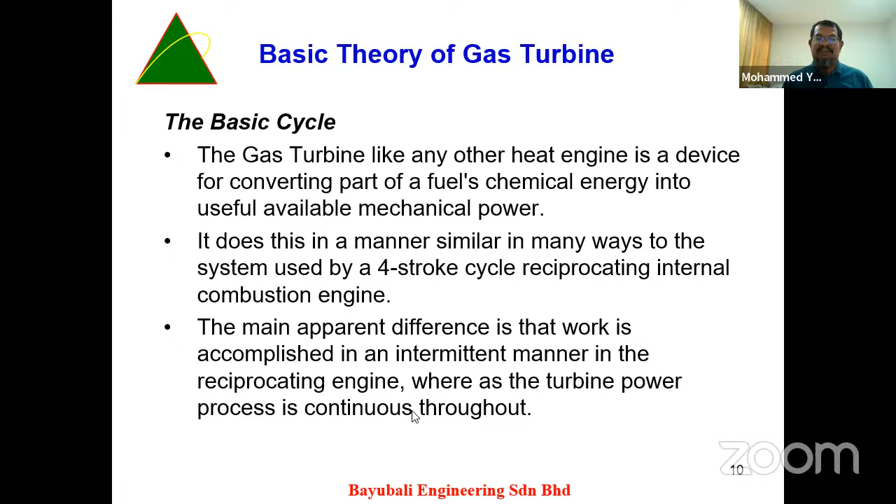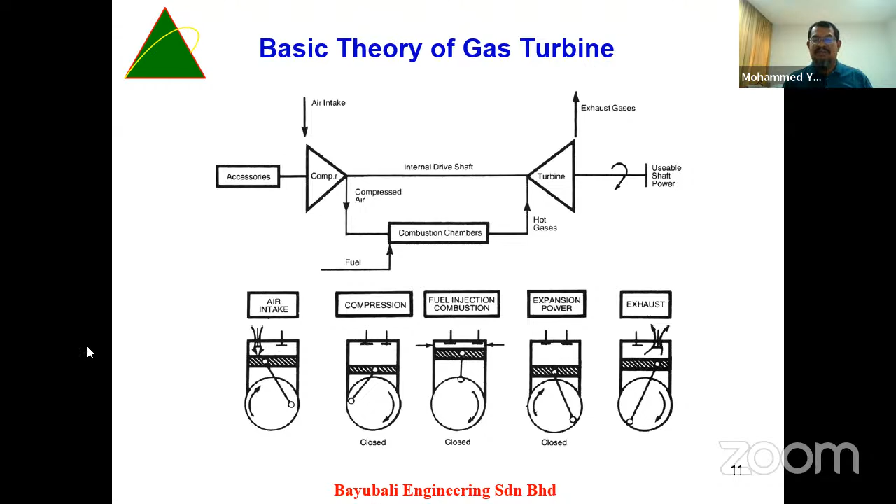So we know for a gas turbine, air is drawn into the compressor, usually through a filter situated in the filter house to remove any harmful solid particles from the airstream. This air is then compressed to a design figure by a multi-stage axial compressor for big size gas turbines; small size normally use a centrifugal compressor. The hot compressed air is then fed to the combustion chamber, where it mixes with injected fuel, and here the fuel burns and adds its energy to the air.

The combustion process raises the air temperature to a flame zone valve, maybe around 1,500 or 1,600. This temperature depends on the engine design.

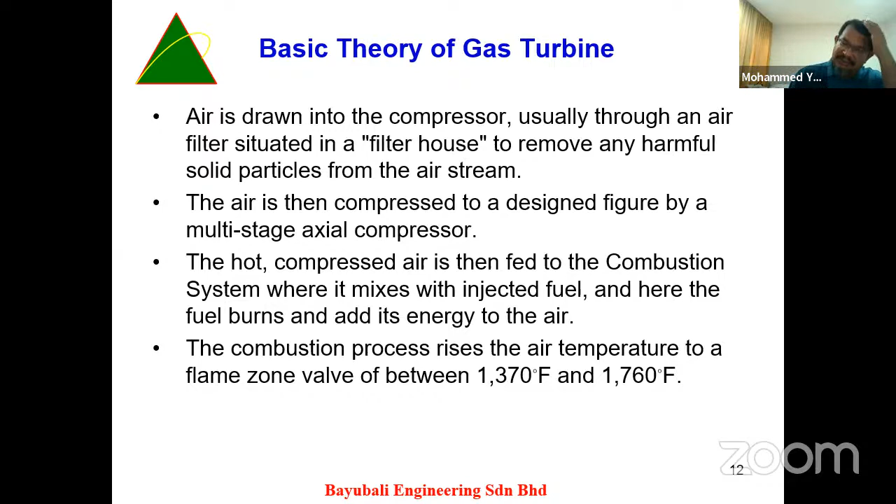The hot gas is immediately reduced to usable values by mixing with secondary air that enters the combustion chamber through properly placed holes, meaning the combustion chamber needs to reduce the temperature through holes in the combustor, because the temperature in the combustion chamber may be around 2,000 degrees Celsius. If not cooled down, it may damage the combustor material.

The hot high pressure gas mixture is then ducted down to the exhaust. In the expansion process, enough energy is removed from the gas to drive the compressor and unit-driven auxiliaries such as auxiliary gears, fuel pump, cooling water pump, lube oil pump, etc. Then the load may be an alternator, gearbox, compressor, or pump, etc.

Since there is still much heat energy in this gas, it can be used in a variety of ways, such as air or water heating, process drying, or as a hot air feed supply to a separately fired boiler, or waste heat recovery. Any of these recovery methods help increase the overall thermal efficiency of the gas turbine.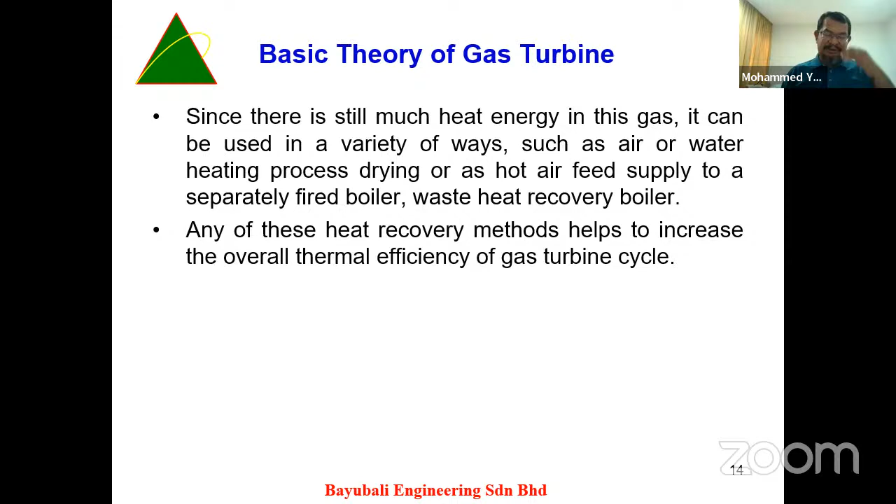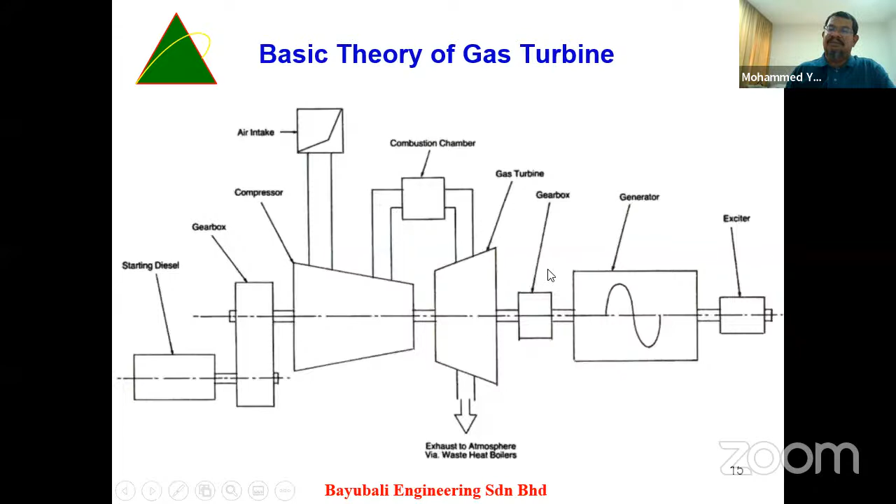This is an example of the gas turbine shown earlier - the filter, compressor, auxiliary. This diesel startup is commonly used for turbine black start. This one is the combustion chamber, this is the diesel engine, and this is what we call the generator.

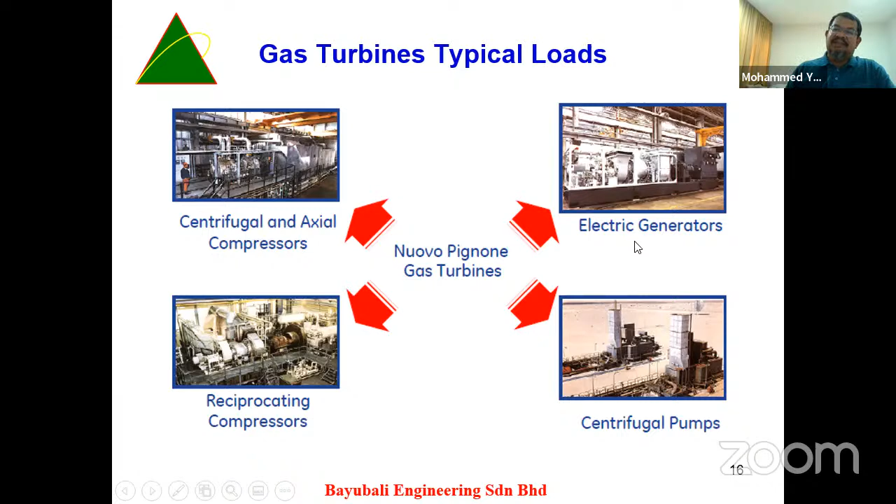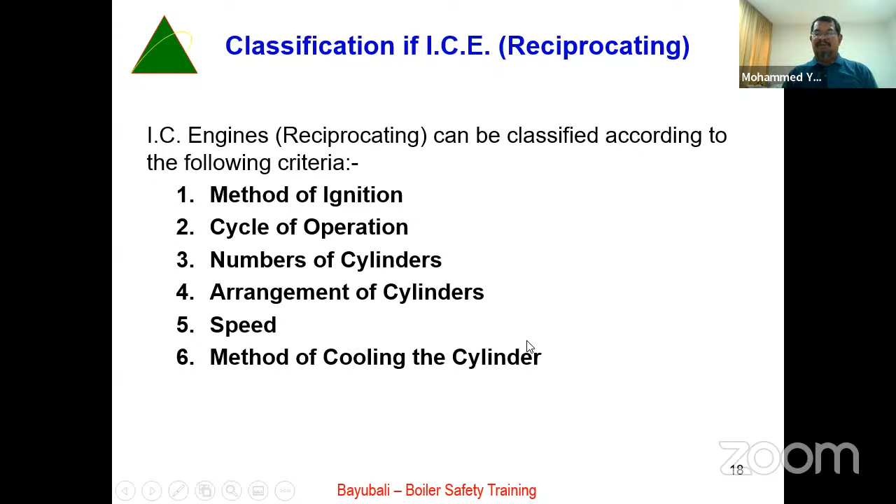So gas turbines can drive centrifugal or reciprocating compressors, electric generators, or centrifugal pumps. Reciprocating engines (ICE) can be classified by method of ignition, cycle of operation, number of cylinders, arrangement of cylinders, speed, and method of cooling the cylinder.

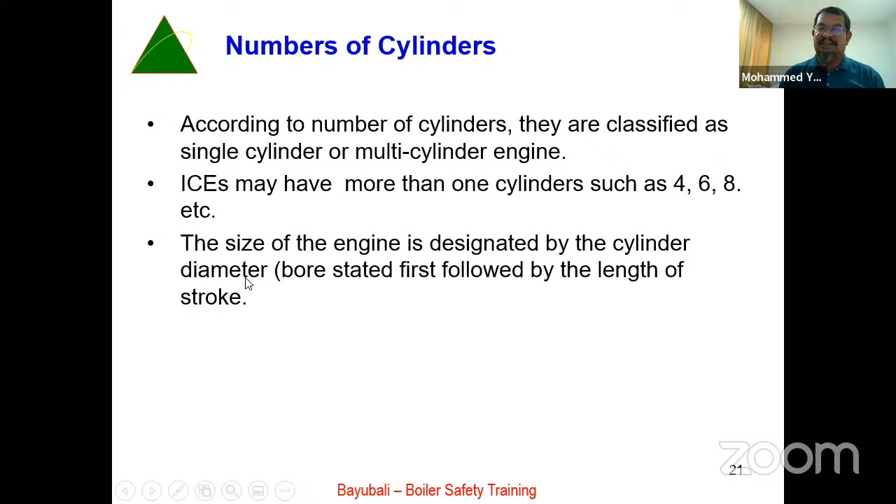According to number of cylinders, engines are classified as single cylinder or multi-cylinder. ICE may have more than one cylinder, such as cars now which have 3, 4, 5, 6, 7, or 8 cylinders. The size of the engine is defined by the cylinder diameter (bore) followed by the length of stroke.

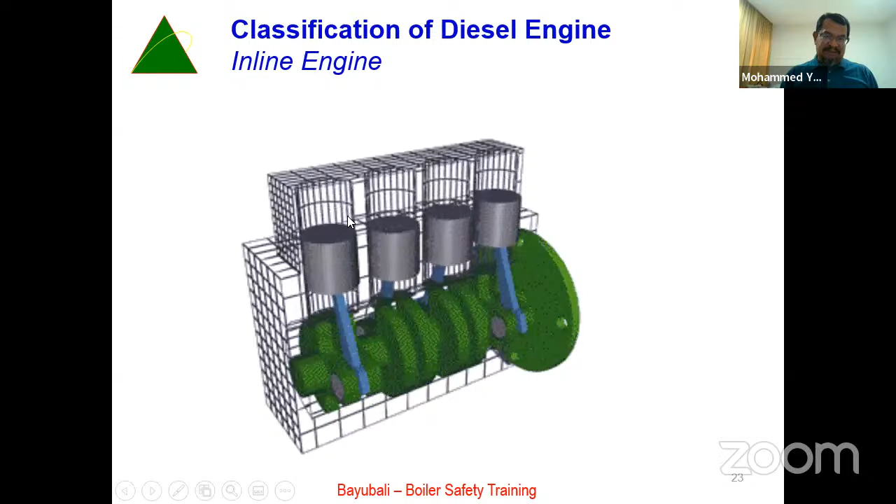Normarzuki, you still there? I think your internet has some issue, some lagging. Maybe internet problem, but it's okay. Now better, yes now better. I don't have a choice, you know. Maybe I'm not in Zimbabwe. Okay, now better.

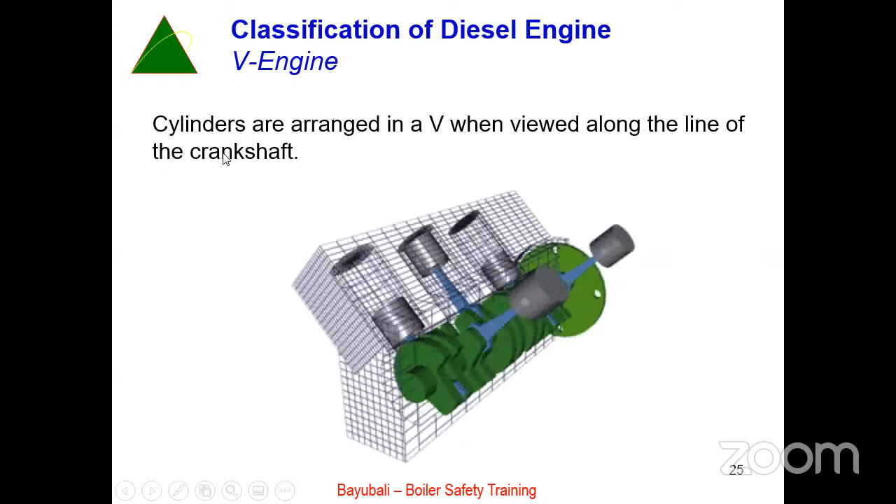So this one is a V engine, and this is another engine example. Speed normally depends on the engine - low speed maybe up to 350 RPM, medium speed up to 1,000, and high speed more than 1,000. Method of cooling can be air cool or water cool.

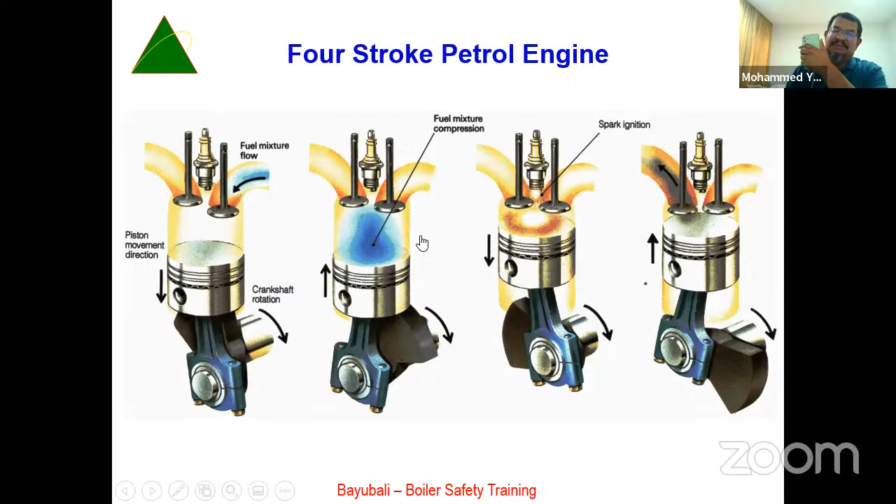This is an example of 4-stroke - suction, valve opens, compression, combustion, and exhaust. So the movement of the valve depends on the cam.

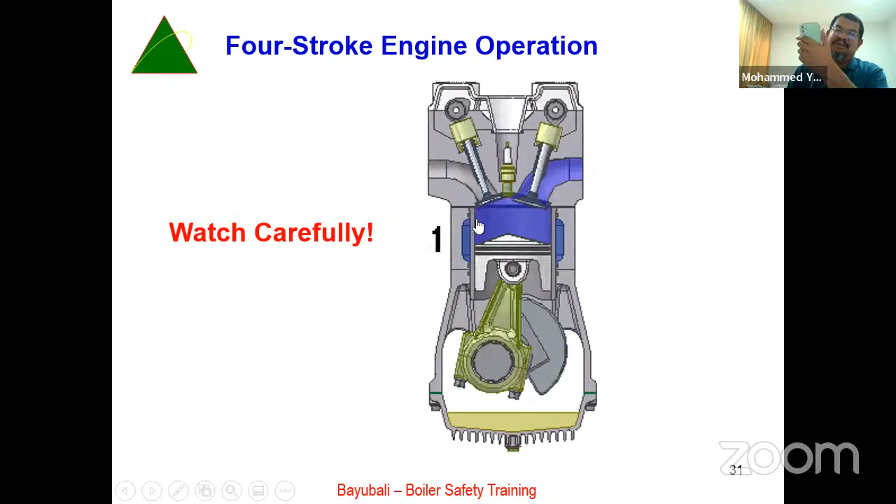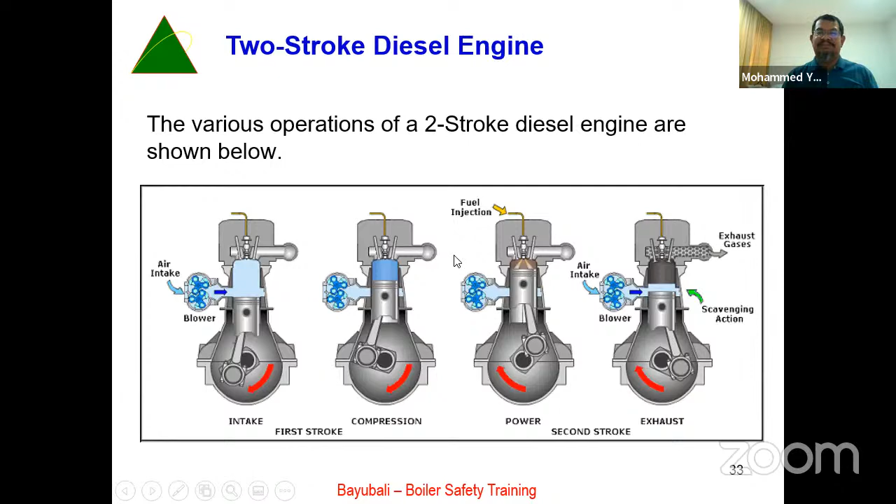So Miss Diana, I've finished my presentation. Sorry, the ICE section is a little bit simpler compared to the steam section.